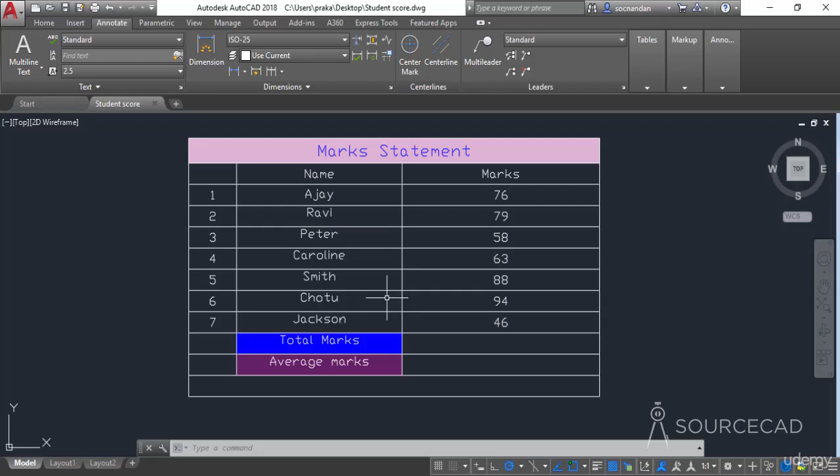Using fields, you can add intelligent information in AutoCAD, and that information is updated automatically. In this case, I'll add the file name, which is student score, in this cell here. So I'll select the cell, and as soon as you select the cell, you'll notice this table cell tab which has this field option.

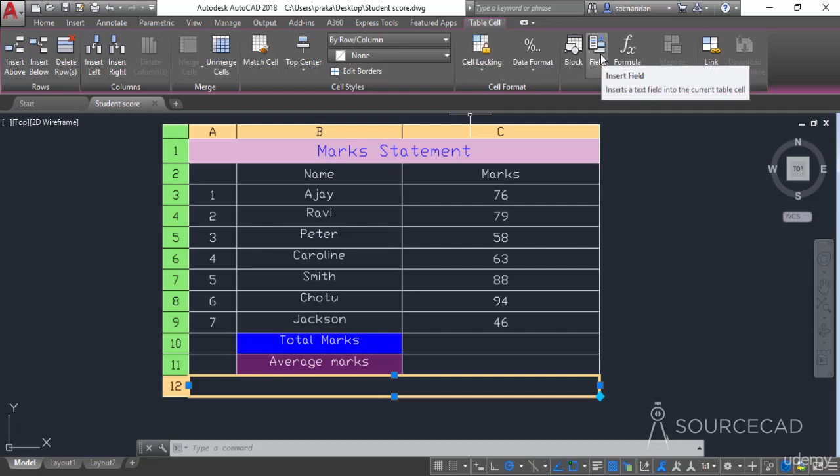Now from this insert panel, select this field, and this will open the field window. From here, go to the field name drop down and select file name, and now select the format. I'll select uppercase format, and I'll select the file name only radio button. Also make sure that display file extension is unchecked.

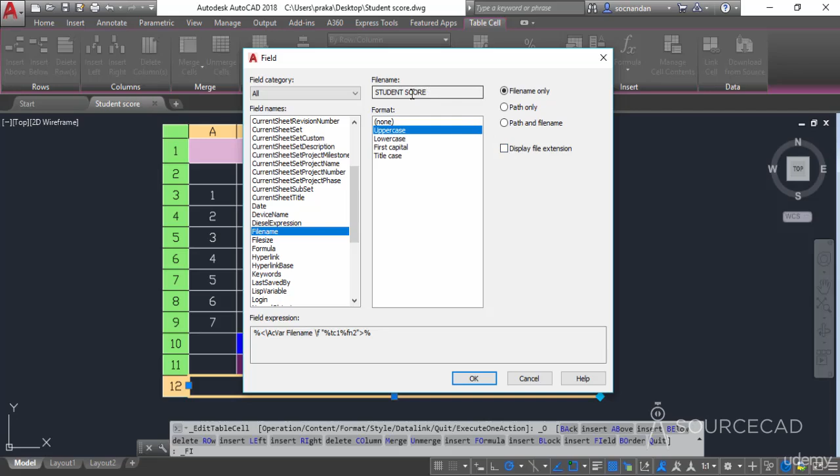We don't want the file extension, and you can see the final preview here. Let's click on OK, and now we have the field here. You can see it quite clearly, student score. Although the field will appear with this gray background, when you plot your drawing, the gray background will not remain visible; it has been added only to identify this field from the rest of the text.

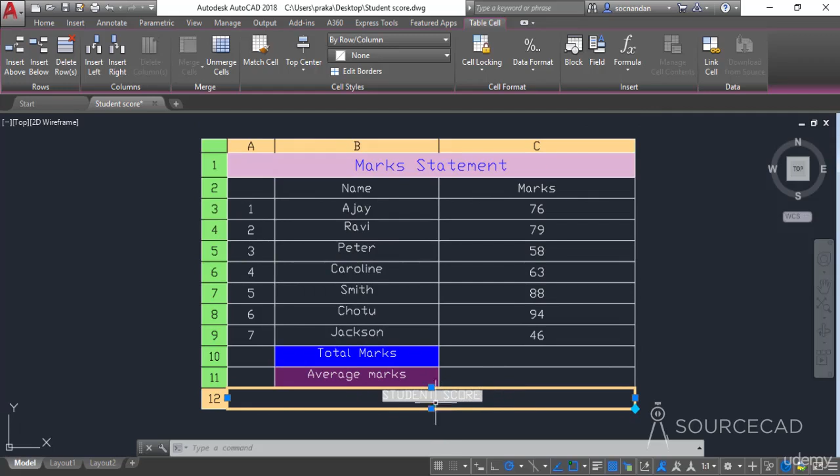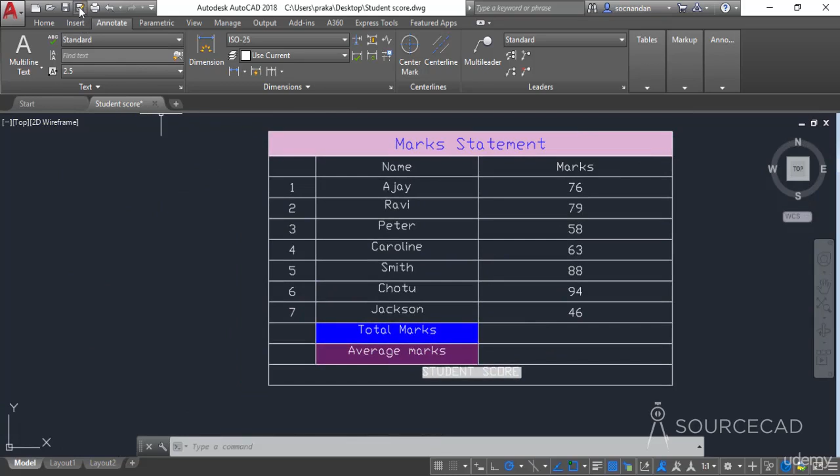In this case, you can clearly see that the field mentions student score here. Now if you change the file name, the field will change automatically. Let's change it. So I'll change the file name. I'll click on save as. I'll specify desktop as the location, and now I'll add card as a new text, and let's click on save.

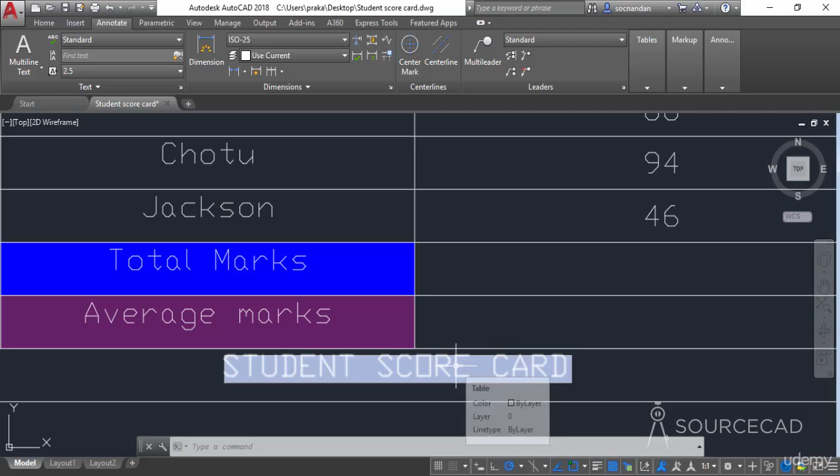Let's look at the field, and here we have a new field, student scorecard. So in this way it is automatically updated, and we don't need to manually change the value here. And if for some reason you are not able to update these fields, then you can use the REGEN command to regenerate the complete drawing, and the fields will be updated.

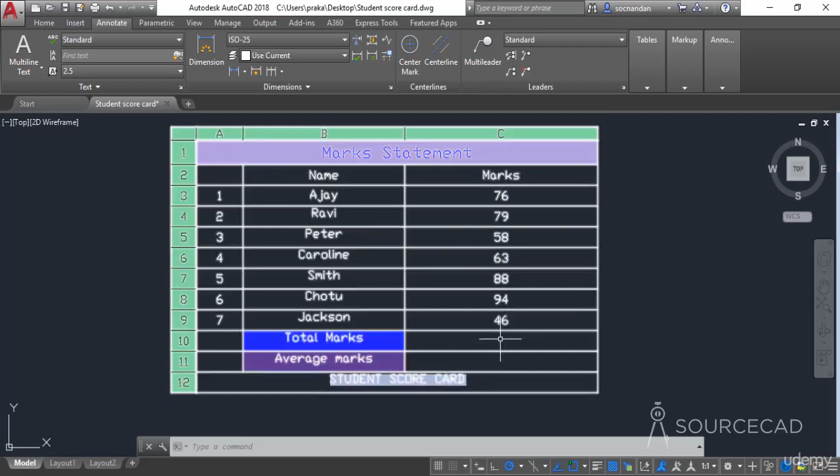Now let's move to the formulas. We can also use formulas just like Excel to add information here. Let's say that we want to add the total marks of all of these students in this cell. For that, I'll select the cell and go to formula. Obviously we need the sum of all of these marks. So I'll select sum, and now click on the first cell from where you want to start the calculation, and the last cell. So we want a sum of all of these cells, and here you have it.

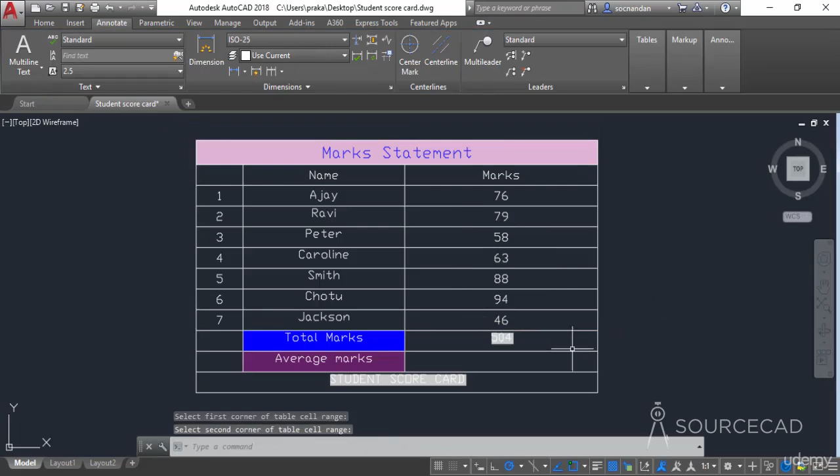Now click outside, and we have the result here as a field. You can see that the complete value is 504. This is also a field as indicated by the gray background, and if you change any of these values, the field will update. Let's change any of these values. So I'll change this text. We have 46 here. Let's change it to 56.

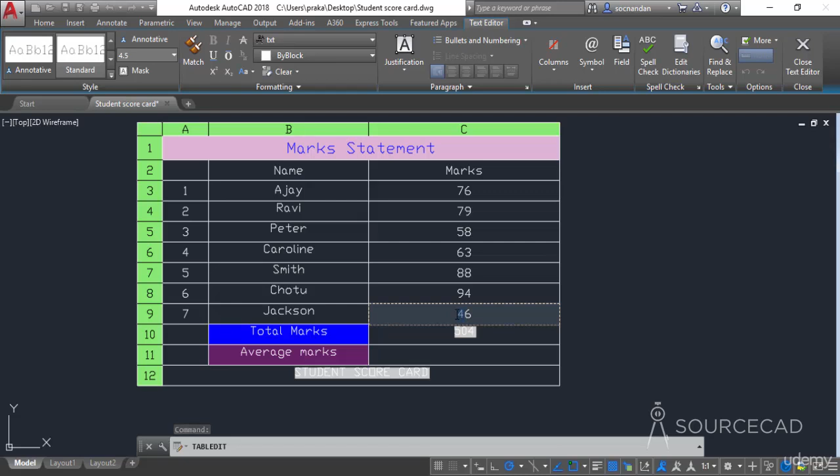Now click outside, and let's look at the field. Now we have 514 instead of 504. So the field is automatically updated. And in this case also, if your field did not update, you can use the REGEN command to update it manually.

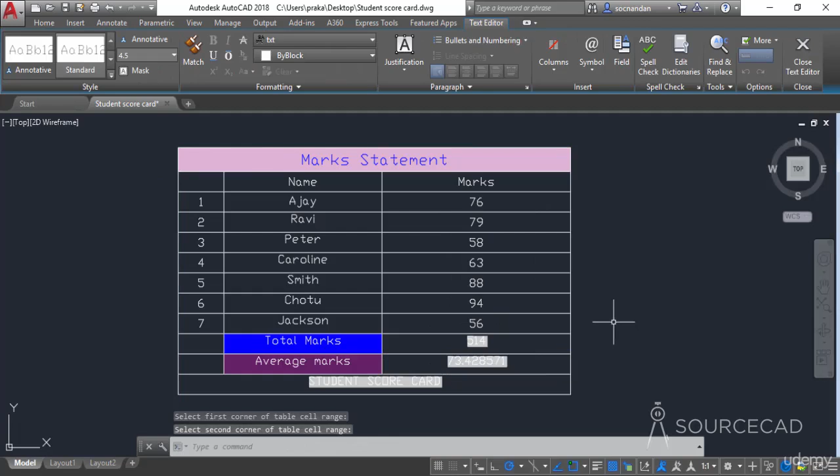Now here we have average marks. Let's add that also. So I'll select the cell, go to formula, and select average. Once again, I'll click on the first cell and the last cell, and the average formula has been added. Click outside, and we have the average value here, accurate up to the decimal points specified in the current template. So we have the average 73.428571. So that was all about adding fields and formulas in our AutoCAD table.